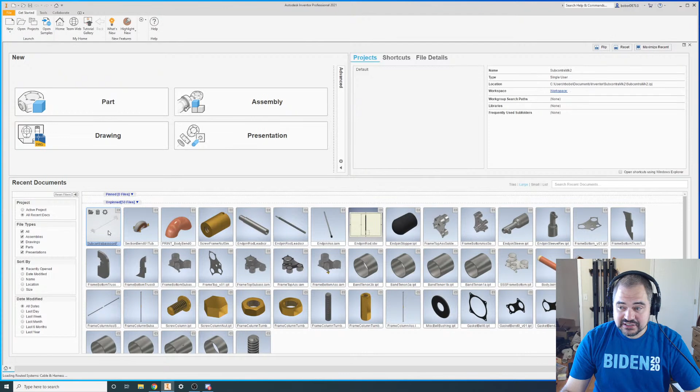So let's get this open, and I'll talk a little bit about what work I have to do. Hold on a second. Let me... Here's...

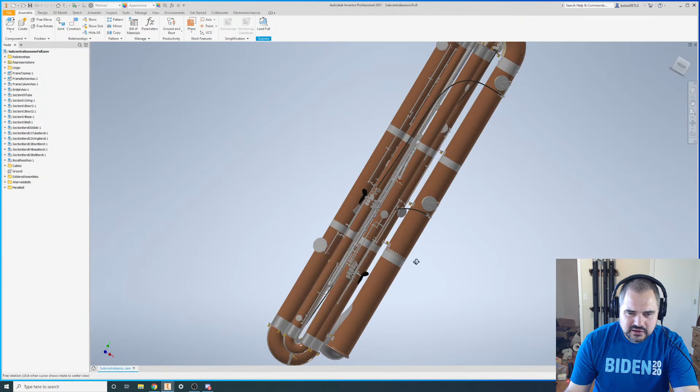Okay. So, actually, at one point this was a pretty concise and logical file. But as I've made adjustments and modifications and revisions, as I've actually been working on the prototype, gradually it's gotten a little out of hand. So, you know, we have two different bells, and the structure of these files isn't consistent.

So now that I have it on my home computer and don't have to go all the way to the shop, I've been going through and modifying these to get everything nice and logical again. So let's hide. So I've been going through in order.

If anyone can actually hear me, can you post something in chat? I suppose I should have checked that first. Okay. Yeah.

Okay, so here we have the parts of the assembly that I've already worked on, that I've already gotten updated. So the top and bottom frame, the end pin, and this central support column. There were quite a bit of revisions here, but let's go ahead and open this subassembly here, the top frame. We can take a little bit of a closer look.

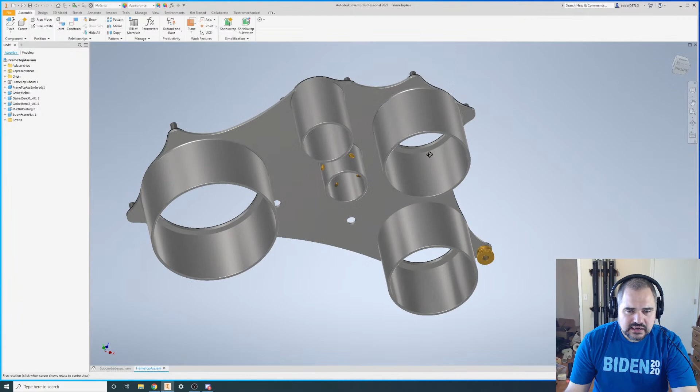I did make one change here. So if we go into this subassembly, this is the subassembly for the top frame, all the pieces that are eventually soldered or welded together. So I did have some changes I made here, just with the way these studs weld up here. I think this will make it a little bit... There we go. Should make it a little bit easier to see these edges.

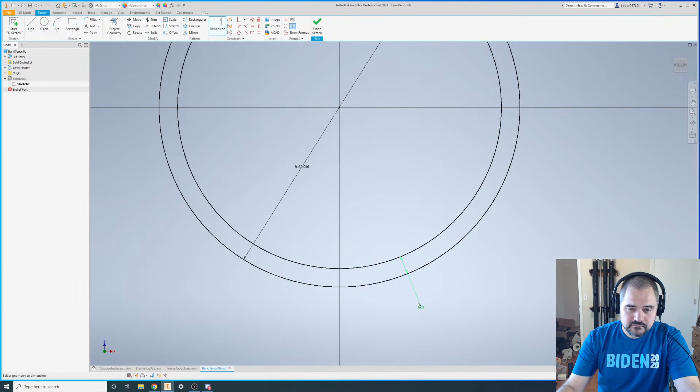I also made a change here on the version I have behind me. I'll open up one of these tenons. On the version I had behind me, I had a thickness of 1.5 millimeters. But going forward, if I'm ever lucky enough to make a second subcontrabassoon, I'm going to make these slightly thicker. So thicken that out to 2 millimeters. And then all of those, likewise, 2 millimeters.

But yeah, that subassembly is pretty straightforward. It's a pain to weld, but the actual geometry isn't that complex. I also did away with... Originally, I had all of these tenons had holes in them, but with the column, I began to feel like those probably weren't necessary, and so I got rid of most of those, with the exception of this tenon here.

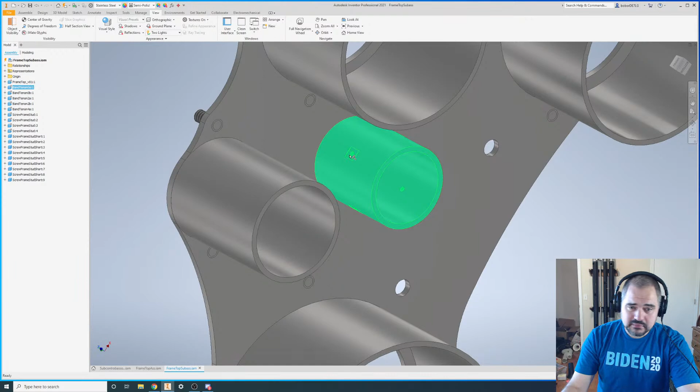And the reason I kept them here is because this is the tenon for the tube assembly, and the tube assembly is not going to be supported by the bottom frame, only by the top frame. So I figured these retention screws would still be useful here. All right. So yeah, we can see these tube assembly retention screws.

And so what I've done is I have two versions of this top frame. One is an actual assembly that has all of the subcomponents. So each of these studs is separate. Each of these tenons that has to be individually machined are separate.

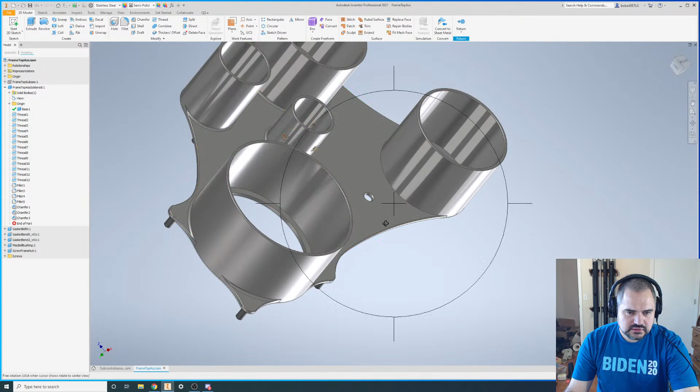And then I also have a soldered assembly. So this is just a separate version of the subassembly that I've gone through, and I've made all these aesthetic welds. Actually, I missed one here. So can do that real quick. Let's see. Yeah. So I missed this corner there.

And I don't really need this, but these soldered assemblies are what I end up using for the glamour shots, like on the website. Okay. So yeah, there's the top frame. Most of the changes are pretty small.

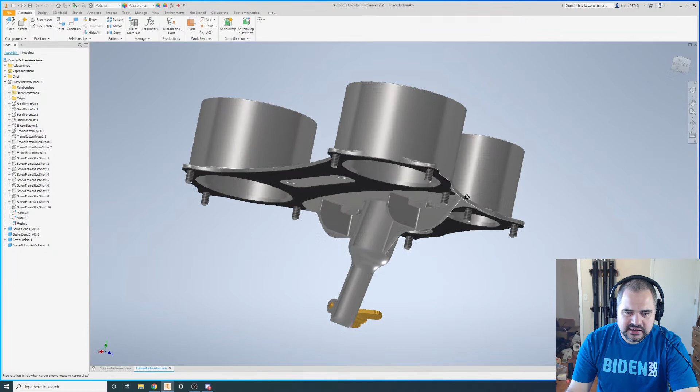Now, we can open up the bottom frame. I made the same changes. So I thickened these tenons to 2 millimeters instead of 1.5. I got rid of the retention screws, and I also changed the end pin sleeve to match the way that I actually ended up making it.

And then, like the top frame, I also have a soldered assembly for renders and other things like that. I also changed, well, I'll talk about that in a little bit.

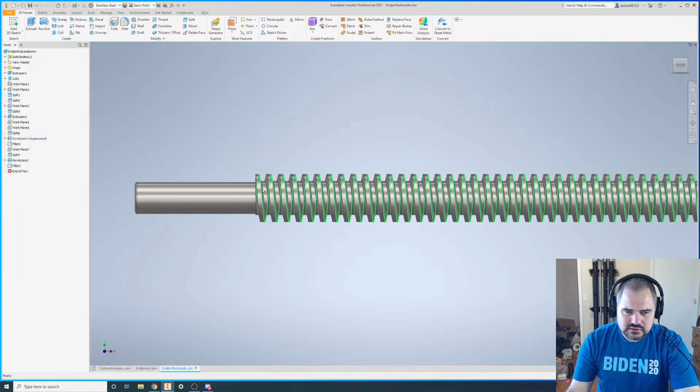And then if we go to the end pin, the end pin is actually quite a bit different. I originally had planned on using some custom threading for the end pin, but eventually I decided that it would be easier just to use readily available lead screw threads, and then just machine that.

And then the slightly different design of the end pin stopper that I ended up using matches the ones that I was able to buy. These are just 10 millimeter upright bass end pin stoppers. So got all that done.

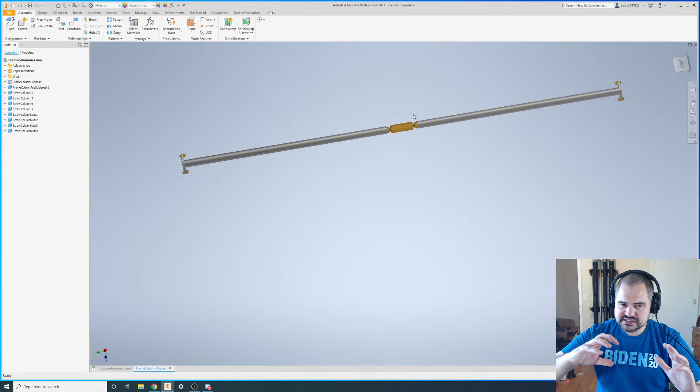And then the biggest change here was I completely redid the column assembly. So by adding a turnbuckle here, I'm able to adjust the length of the column without adjusting the angle of those top plates. So this allows me to not only use the column to gently push it apart, but I can also use it to gently pull it together. So overall, I think I'm pretty happy with this construction here.

By the way, if anyone has any questions, feel free to ask. I don't exactly have an outline of what all I'm going to cover.

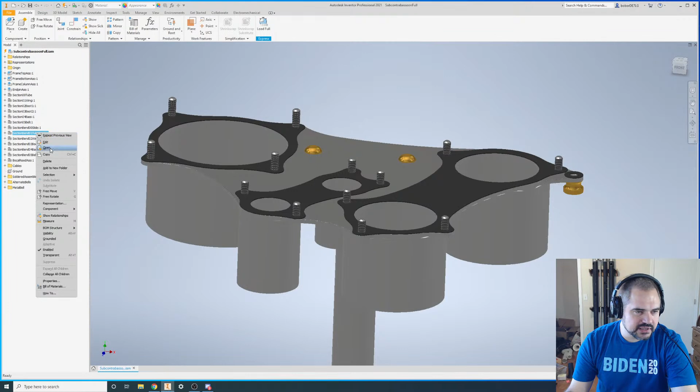Okay, so that's what I've done so far, getting everything up to date. So let's open up a new part. Let's start with this part here. This is the smallest body bend. And it looks like that.

And so there's a couple of things that are kind of out of date here. You see I still have these seams here from when I was planning on making it out of a solid piece of plastic in 2 halves, and then sandwiching those 2 halves together, similar to how the top bend on a contrabassoon is made. And I want to keep those files. I don't want to delete them, just in case I change my mind. But I do want to move them into a separate folder so that they're easier to hide.

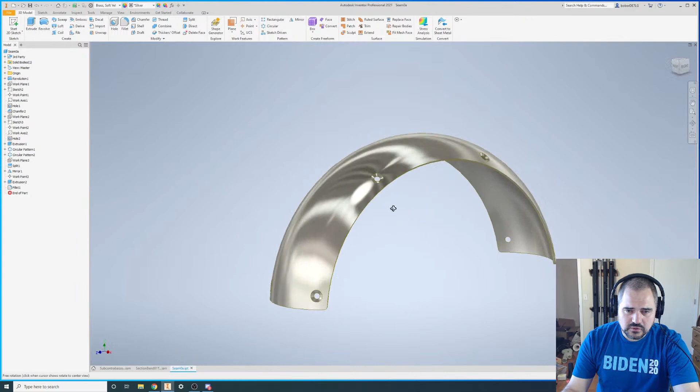Now, one thing I've been doing is updating all the materials. There's some out-of-date stuff here. So let's change. There we go. So I've changed the material itself to brass, which means for any sort of weight calculations, it's going to be brass. And then if I were actually making this, I would probably want to silver or nickel plate it. So I've added an appearance of silver just to make it pretty. I thought about adding a slight fillet on all of these edges for rendering purposes, but I don't think that'll be useful.

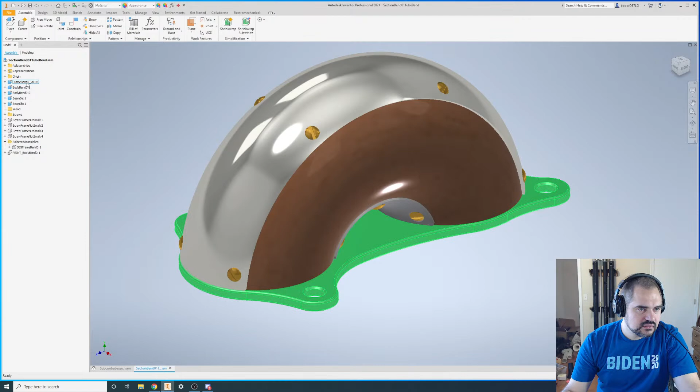So let's create a, hold on a second. So I'm going to create a new folder, and I'll just call that folder wood. So this is the construction I would need to use if I were making this bend out of wood. Let's hide all of these for the time being. So anything that I'm only going to need if we're making it out of wood, I'm going to put in this folder. So both of these, the seams, and all of these guard screws. So now I can hide and unhide this whole folder at once easily.

Let me make that material change here. So Jared is asking how I would make the metal guards custom formed? Are you talking about these seams, the pieces that hold the 2 halves of the bend together?

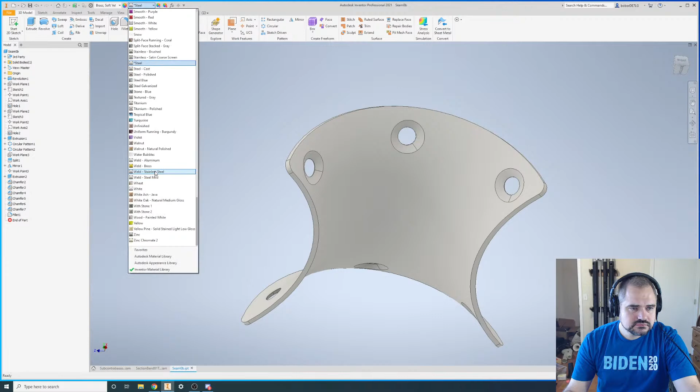So the way that I was probably going to have to do these is almost like a little roller. You take a flat piece of metal and then you roll it through a form. I've seen what they use at the Fox factory to do this. I wish I had a picture of it to describe it, but it's this bizarre looking roller. And I would have needed multiple ones. So if I don't need to make these pieces out of wood, then that will save me some custom tooling.

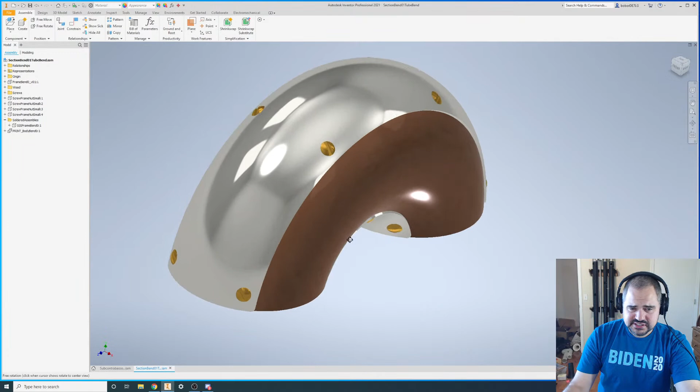And I should say that I've come close to deciding that for the bends, 3D printed ABS is just the way to go. Even if I were making the rest of the instrument out of wood, I would be very tempted to use plastic for these bends, just because it drastically simplifies construction. It lowers the weight. It allows you to do any profile you would want. Now, for reasons I've talked about in other videos, these are actually cylindrical bends. But if I wanted these bends to be conical, by 3D printing them out of ABS, I could do that easily.

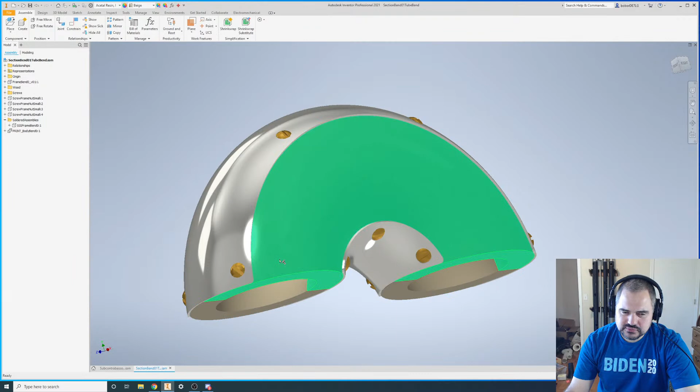And as I've talked about in an earlier video, acoustically, there's good reason to believe that cylindrical bends would be just as good, if not better, than conical bends, which is what you might expect you would want. Okay.

So these are, well, hold on. Let me open this and make sure. Okay, yeah, that's fine. Don't need to get too complicated with these little tiny screws. So let's hide all of those and get the updated version, the version that I've actually made and think is the best option. Delete that. Okay, so let's start here. This is the frame assembly.

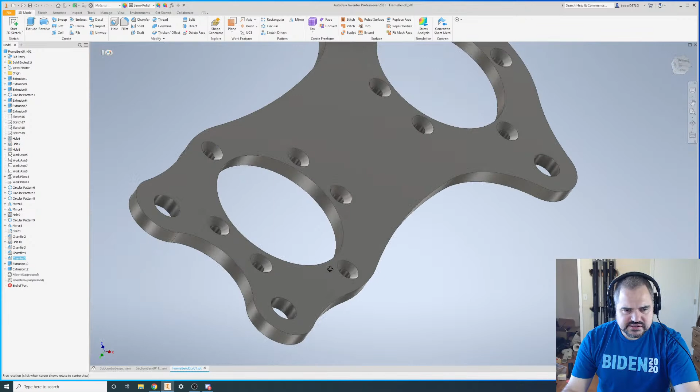So the only change I'm going to make here... okay, yeah. So the thing I'm trying to fix here is, this part isn't soldered to anything, so I don't need to make a separate subassembly. But I also have, for instance, this fillet here that is just cosmetic for the renders, as is this little chamfer here.

Trying to figure out if I should make 2 copies of this. Okay, I'll keep the 1 copy, because the way it is now, I can't export this face as a DXF because then it would be slightly undersized. But I don't need a whole separate file for that. Since these are at the end, I can just move my end of part up, export the face, and then move the end of the part.

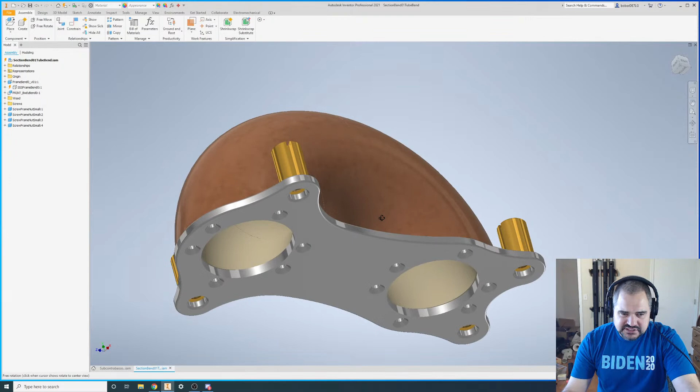So that'll be fine. So Seltzer asks, how would you finish the bends in a way that satisfies traditionalists? I tend to be of the opinion that if it's plastic, I'd rather it look like plastic, not pretend to be something else. The inner bore of a bassoon wing joint and half the boot joint is not wood. It's lined with either rubber or plastic. And even on the contrabassoon, most of the bends are made out of metal rather than wood. So I wouldn't think it would be that big of a deal. If someone was that concerned about it, I would suggest they just make it out of wood, rather than trying to make the plastic look like wood.

Okay. Now we have all of these frame nuts. Those are fine. And let's go ahead and open this. So this is the modified version of that bend that I've designed for 3D printing. I have the pilot holes for those screws already modeled into the piece. I've divided it into 4 segments to be glued together with ABS glue.

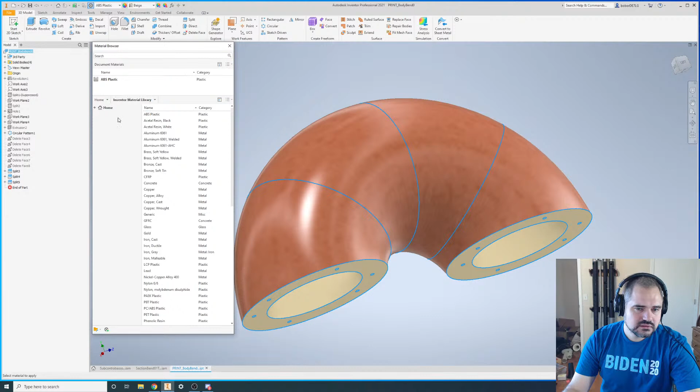Now, one thing I am going to change. Right now, I have the material set to Delrin, which isn't going to cause a problem, but if I wanted accurate weight, it would overestimate the weight by quite a bit. But it's not going to give me an accurate weight for 3D printed parts anyway, because the 3D printed parts are hollow.

Austin says hi. Hi, Austin.

Okay, so let's clear all of that. So wait, why do I have 5 bodies? Okay, I don't. All right. So let's just change that to smooth black to more accurately reflect the material. And of course, once I export this to Blender, I can assign any value to this I want. Okay.

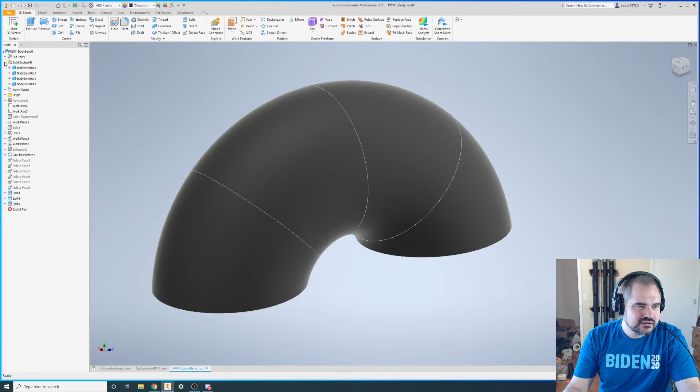So yeah, let's rename this. Right now I have a prefix of print added to all of these. Since this is going to be the main way that I'm planning on doing this, I'm going to change that to, let's just say, body bend 01 R1, so revision 1. Probably what I'd like to do is make a separate copy of this that's not divided, for rendering purposes.

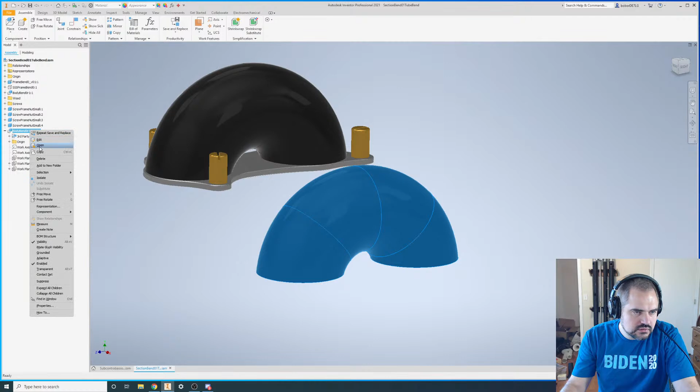Okay, so I'm going to change the name of this one as well. The easiest way I know how to do that in Inventor is save and replace. Okay, body bend 01 R1, and save and replace this. And I'll make a glued version of this. And then I can just undo all of... I can delete all of these splits.

And what are all of these delete faces for? Delete those. Delete all those pins. So these are, well, here. So if we go back to the version that's been split up, you can see here I have the holes for alignment pins. This is just 1.75 millimeter nylon filament that I've used here to get these pieces in alignment, but I don't need them for the glued model.

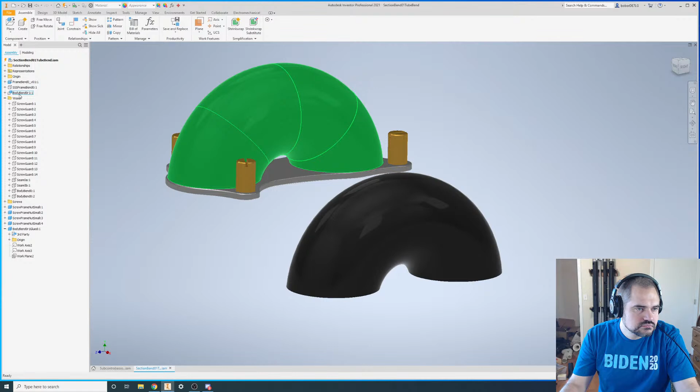So I can delete those, delete those. Yeah, that's fine. Don't need any of those. I do want those. Okay. There we go. Select all. Smooth black. Okay. So now I have a... I actually ended up with 3 versions of the body. So the construction version, which has the 4 separate components, the wood version that has the 2 halves, and then the single version.

And I'm just going to align this other version. Since the glued version is a copy of the construction version, I'm just going to constrain it to all of the origin axes. And then that will get it exactly where it needs to be. Okay.

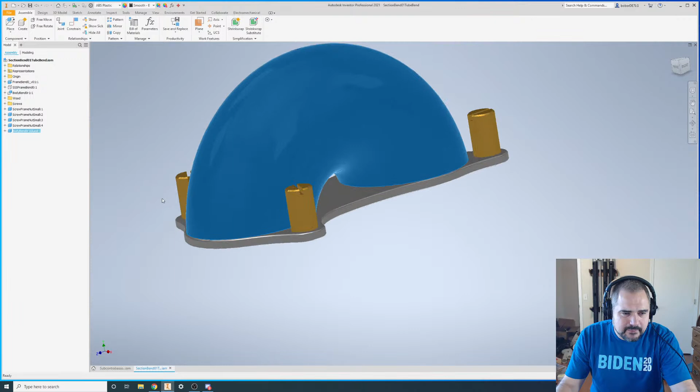What progress, Seltzer asks, have I made on the subcontrabassoon reed? Well, I haven't been messing with the reeds too much, but I did make a shaper. If you look at one of my recent live streams, there's a stream called Shaping a Shaper onto Shapeoko, where I go over the process of how I made a shaper, including a subcontrabassoon shaper. So that will make experimenting with reeds much easier when that eventually happens.

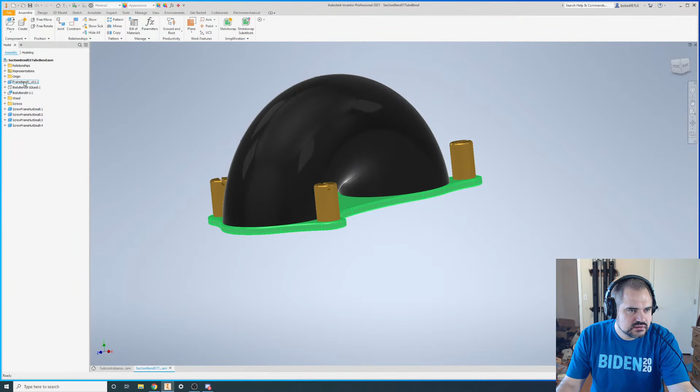I don't need this. Okay. So all of that, and then, okay. So I think that does it for this part here. And I can go ahead and make that visible here. And then go in and hide the wood stuff. And wait, that wasn't right. All right, there we go. So, all right, actually, before I move on to something else, let's open up one of these and take a look at the construction here of this body joint.

So these bends are actually quite simple. I've taken a cross section here with a given radius, a given inner diameter, and a given wall thickness. And all of those are calculated from the master spreadsheet. Well, here. If I go into my parameters, this section here, these are parameters that have been imported from the master spreadsheet. So hole position F1, hole size F1.

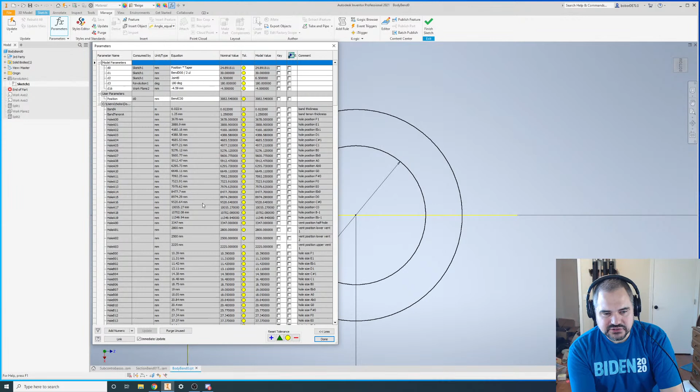The original thought was that this would make it easier to make changes by just changing a spreadsheet. In actual practice, I shouldn't have used this much of a spreadsheet, because now if I do want to change one of these variables and update the spreadsheet, it literally takes like 10 minutes for the entire model to update.

So the user parameter of position refers to the spreadsheet parameter of BendC00, which if I go down here, it's just the position in the bore at which this bend starts. So 3082. So instead of just entering 24.892, I'm multiplying the position times the taper, which will produce the diameter at that point. And then the wall thickness is also a parameter, as is the radius.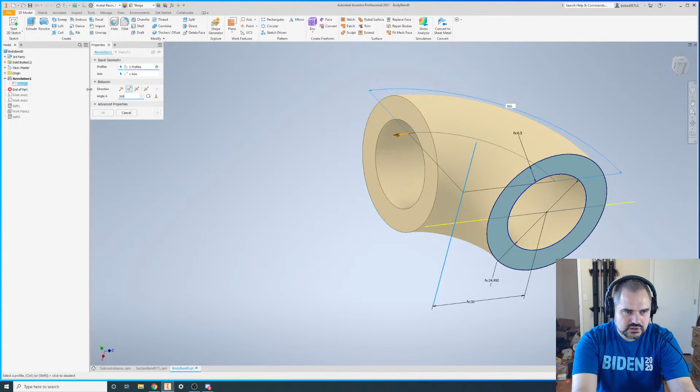And then that is revolved around this central axis, 180 degrees. So I could do 90 degrees for a quarter bend. I could do 360 for a donut, but I need a 180 degree bend. And then these are just work axes for constraining the part.

Then I've split it in half. And then I've cut off a little bit from the end to make up for two things: for the thickness of the plate that it's bolted onto, and also to compensate a little bit for the acoustics of having such a tight bend. So let's go back here. So that's how the geometry of these bends are.

Austin, I think you were asking what this is. This is the top frame assembly that kind of holds the entire subcontrabassoon together. And then there's another frame assembly on the bottom.

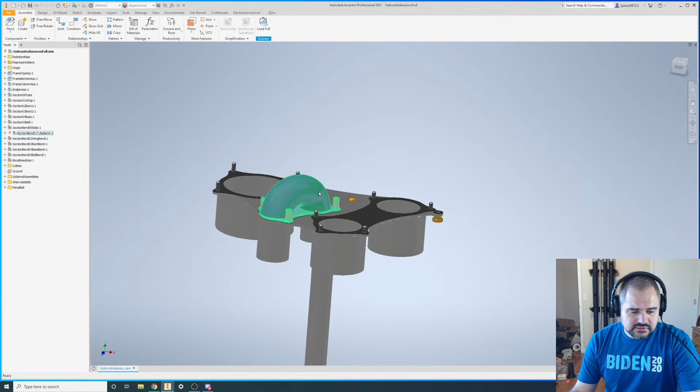So when you have a bend, the tighter it is, and by tight I mean the larger the bore diameter relative to the bend diameter, the more that bend deviates from how it would sound if it were a straight piece of the same length. If you have a big sweeping bend, like the type you're going to see on a lot of brass instruments, the difference is negligible. But on some of these very tight bends that we like to use on woodwinds to make things practical, there can be deviations. Specifically, it can interfere with the tuning in different octaves or different registers.

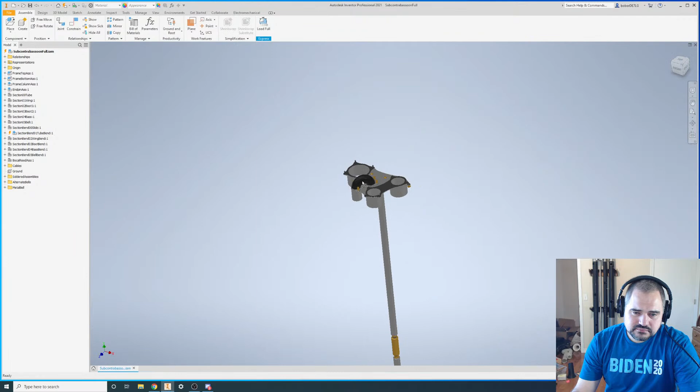So this one isn't that severe, this bend here, but ideally, sorry, trying to think through this while talking. It needs to be shortened a little bit to function with the length that it needs to.

Okay, so what's going on here? Update. Okay, now everything's relationship with undefined geometry. Okay, yeah, I know what that is. So all of these frame nuts were constrained to these holes before I chamfered them. So then when I chamfered the holes, it threw an error.

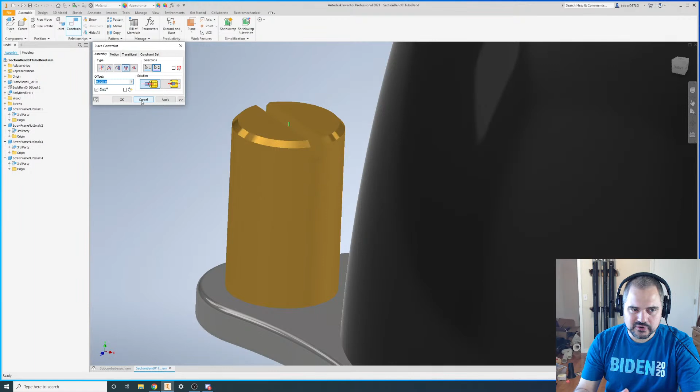So instead of doing an insert constraint, which is essentially constraining that circle to this circle, that's what I did before. But as a consequence, if I get rid of that chamfer, the constraint breaks. So instead, what I'm going to do is two constraints. First, I'm going to do a mate constraint there. So surface to surface.

Okay. So now the frame nuts are constrained to be flat with the surface, but not with the hole. And now I'm going to add a center line, mate the center lines to one another. So the end result will be the same, but now if I get rid of those chamfers for some reason, it won't break. Okay, there we go.

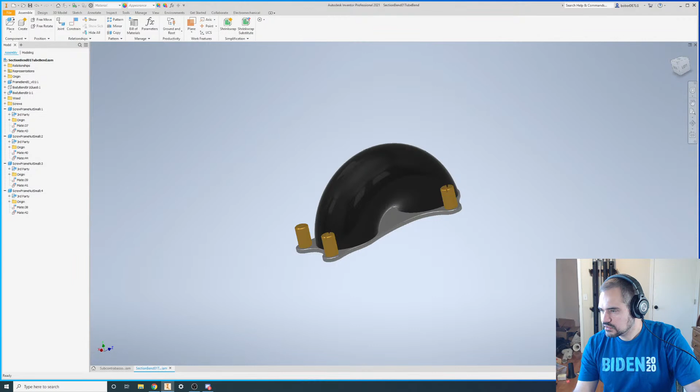Oh, amazing sound effects. Yeah, when you work with Inventor, it becomes a very reassuring sound effect, that nice little pop when a constraint goes through, because the other possibility is that the constraint that you try to add conflicts with a constraint, and then you get the evil bong, like boom.

Here, I can do that. So if I just constrain, there we go. Yeah, that's the sound you don't want. That means you tried to do something illegal. Okay. So that should be it there.

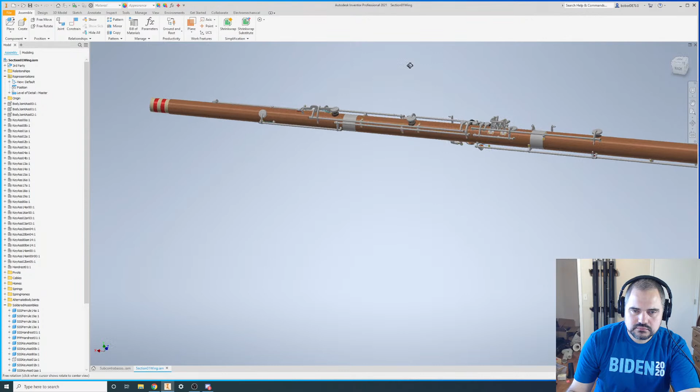So while I'm here, before I go through and update the rest of these bends, let's take a look at a different part. So this is the wing assembly. So these are the three body joints that make up the Subcontrabassoon wing section, with tone holes for F sharp, F, E, E flat, D, and C sharp on the back.

So I'm just gonna open up more of these. Hold on. So here we have the first body joint in a subassembly, and then open up that subassembly, and you finally get to the body joint itself.

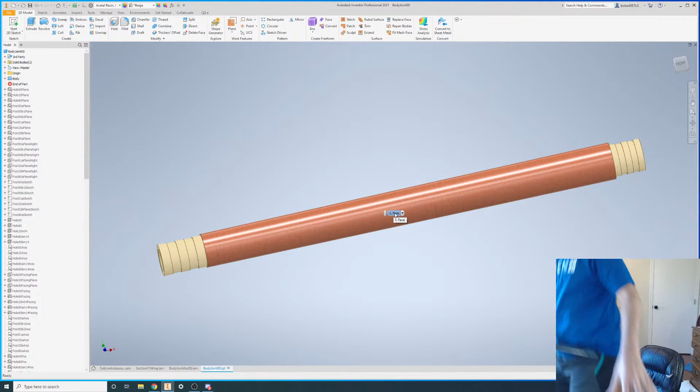So much in the same way we talked a little bit about the construction of the bends, I'll go ahead and open up this so you can see how this is constructed. I'll move the end of part all the way to the beginning. So this is how it starts. Actually, hold on a second. So this is the part that I have on screen right now. You can see that just like the part on screen, I just have the outer profile. I haven't done any tone holes yet.

But I tried something interesting here. Instead of machining it out of a solid rod, I 3D printed this solid. So instead of a couple shells and then hollow in the middle, this was printed with completely solid 100% infill, and then glued together, and then I put that on the lathe and machined it just like any other piece of material.

The big advantage being, instead of having to hog out all of that material, it was only slightly undersized for the reamer. So that ended up saving a lot of trouble, and it's also much lighter than Delrin. ABS is about, I think, 1.05 grams per cubic centimeter, whereas Delrin's more like 1.5. So 1.05 versus 1.5. So even 100% solid, this is significantly lighter than Delrin. A little bit heavier than it would be if I made it out of maple, but lighter than Delrin. Okay.

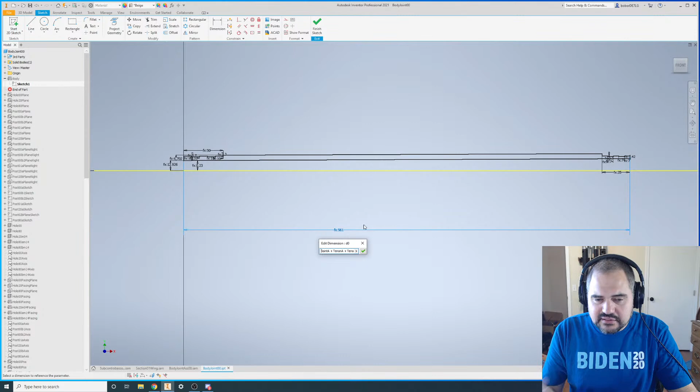Okay. So once again, this is a revolution of a sketch of a cross section around an axis. So if I open up this sketch, you can see that I just have the basic bore. So here we have the calculation of the overall length based on some parameters I've set in the spreadsheet. Likewise, here is data it's pulling from a spreadsheet. More data from the spreadsheet. So all of this is constructed from the spreadsheet.

So if I'm willing to wait 5 minutes for the spreadsheet to update everything, that theoretically makes it easier to update. So for example, here we just have the position, which is the position along the bore where this body segment begins, times the taper, divided by 2, because this is the half of the profile. And then we have the tenons and the little indentations for string. Then we edit. And this is just another rotation about a central axis.

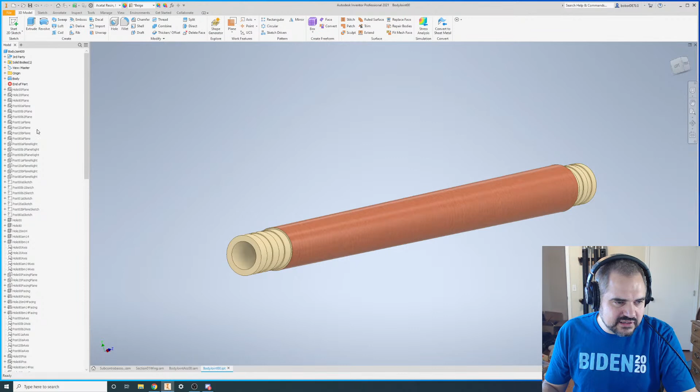360 degrees. So the next part I definitely could have done more easily. So there's all of these work planes and work axes, and all of that is for positioning these holes, as well as giving myself all of the, well, here, I'll show you what I mean. Okay.

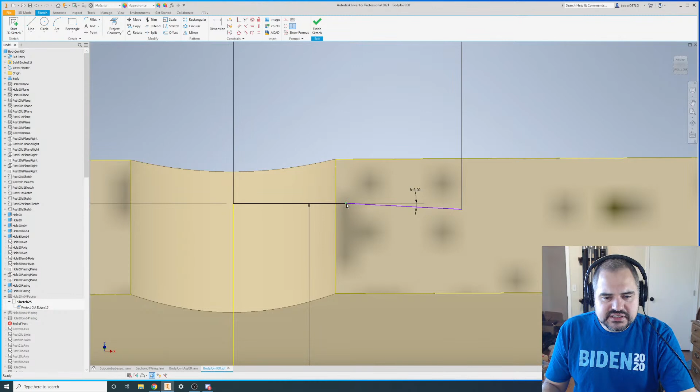So these are the holes themselves. And then if we go down here, we have the hole facings. Okay. So all of those work axes that I defined up here, these work planes and work axes, allow me to get a sketch plane where I need it here. So this is where I'm defining the facing of the tone hole. So actually, let's not do that. There we go.

So on a woodwind, unless you're playing it with your fingers, if it needs to be closed by a pad, of course you don't want just a plain hole. You want a facing for the pad to set on, and that's what I've done here.

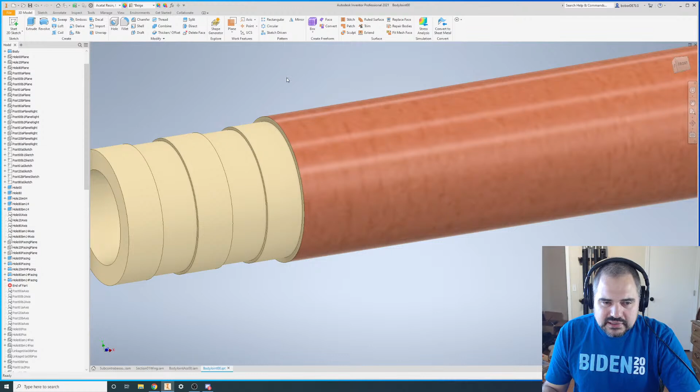Seltzer asks, why did I use a thread fit instead of cork? Because it's more flexible, more room to adjust for things that go wrong. With cork, you could end up having to do a lot of sanding. I just felt like thread was the better solution for this particular design. Also, if I end up putting it together and then some of the body joints are loose, I can just add a little more thread, not have to completely tear off the cork and replace it with thicker cork and then sand that cork. Yeah. I'm not suggesting that thread is necessarily better. It was just better here.

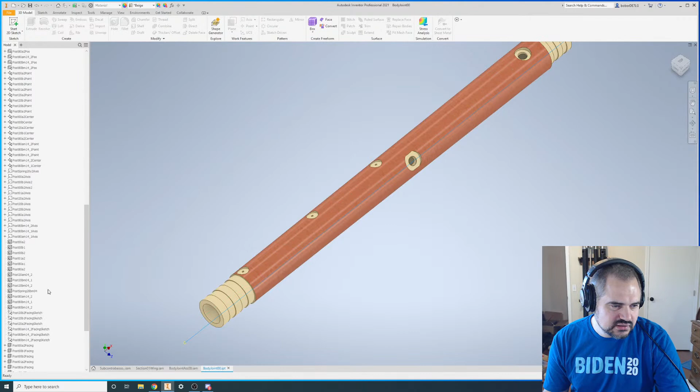Okay, now all of these here are working to define the posts, the post locations. So if I go down here, we have a post there with threads. So because everything's at a slight angle, it does actually end up getting fairly complicated in order to position all of these post holes.

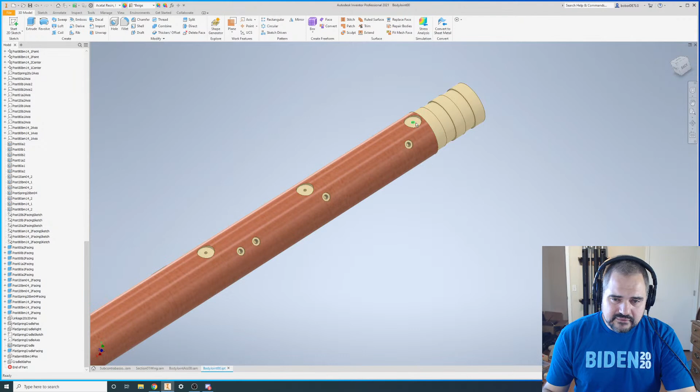Not only positioning them, but for example, some of these post holes are only required on certain modifications. So for example here, you see there are 3 half-hole vents instead of 1. That's because I'm planning for the possibility that I might need 2 half-hole vents, in which case this vent and this vent would be the ones I use, instead of the single vent that I'm planning on, which means that I need to have a plan for all these post holes that may not even appear on the finished version. Okay.

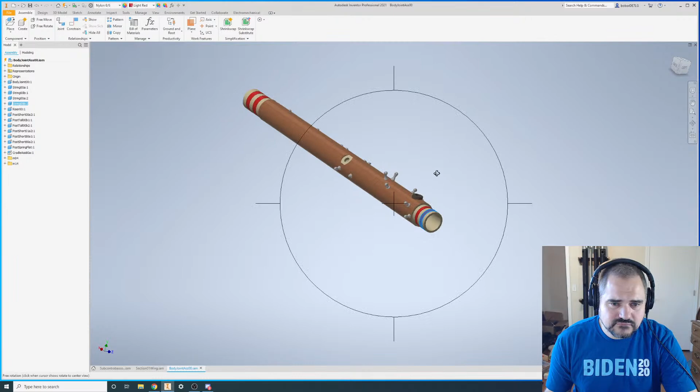Okay, so I can close that. And then in the subassembly, I've just added the components that only involve this single body joint. So all of the posts, this tone hole riser here, the string, and this cradle here.

And we can see here I've suppressed some of those features at some point because I cut these out on the Shapeoko, so I needed to export this face without these chamfers. So that's why all of that was done. Here, I'll go ahead and update this while I'm at it.

I did end up making those out of brass instead of nickel silver, just because I had some extra brass and didn't think it would make any difference whatsoever whether I made those out of brass or nickel silver. Means it looks slightly less pretty because you don't get that contrast between the silver cradle and the brass screw, but whatever, it's fine.

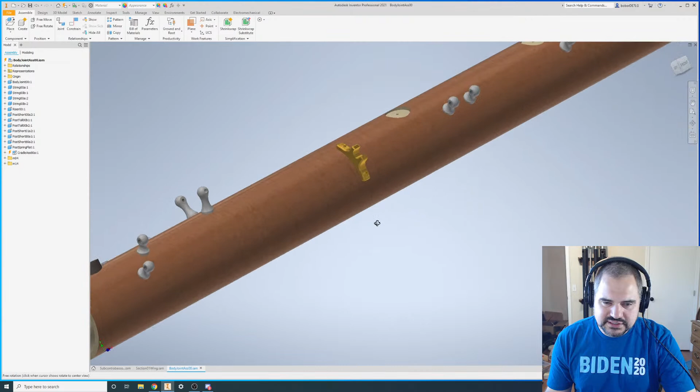Now these posts, I am going to have to go through and change some things. If I sketch. So one issue I ran into, let's see if I can find this. Save. Okay, here we go. So when I originally started the design, I kind of made an assumption that the 5mm posts were actually going to be 5mm, and the 7mm posts were actually going to be 7mm. Unfortunately, when I ordered these posts and got them in, I discovered that they weren't.

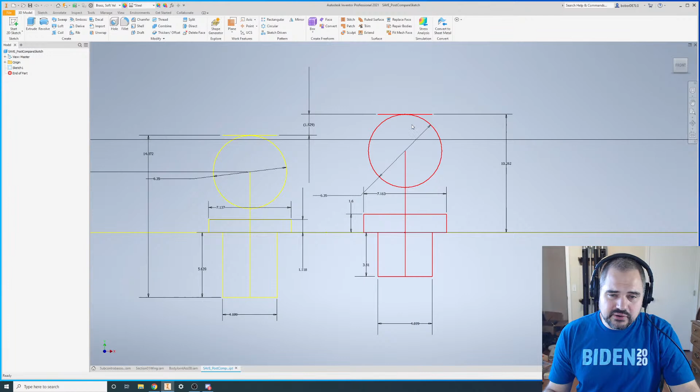So here in red is what I expected the post to measure based on the dimensions I got from the company, but the yellow is the actual measurements. So I am going to have to go through and modify those posts. Now, instead of adjusting the...

Instead of changing every key, because if I change the height of these posts, that affects the height of every key, what I'm going to do is just change the depth of this counterbore here to adjust for the discrepancy.

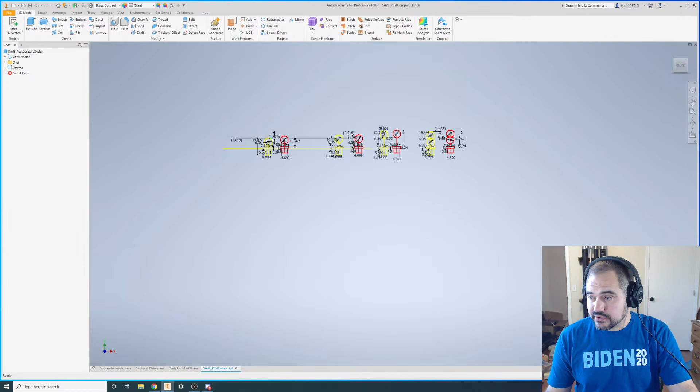Luckily, the post that I use the most often, the 7mm post, was quite accurate, only about 0.2mm discrepancy, and this post here with the largest discrepancy, over 1mm off, I only used it at one point on the top bend and I ended up making adjustments there anyway. So it's not going to be that big of a deal, but it is something I'm going to go ahead and fix now, or not on this stream, but soon.

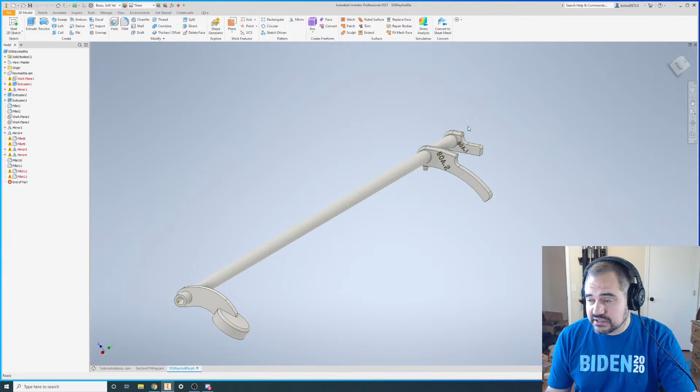Okay, anything else worth talking about here? I think that's okay. And then once we get the entire section together, that's when I added key work. So if I open up here, we can see a key subassembly. And right now there's a bit of a mess, some key work has an aesthetic chamfer, some doesn't. You see there's a whole bunch of... Okay, I see. Hold on a second.

Okay, yeah. So here we have a key assembly. Right now they have some modifications that I made for cutting them out on the Shapeoko, like stamping the name in there. The label of the key isn't going to be stamped on there on the finished version. I just needed this here. So when I was having to export the SVGs for nesting purposes, it's a little bit convoluted, but this is why I'm looking forward to going through and fixing all of this up. And actually, you all might find that interesting. Well, I think I'll have to talk about that later.

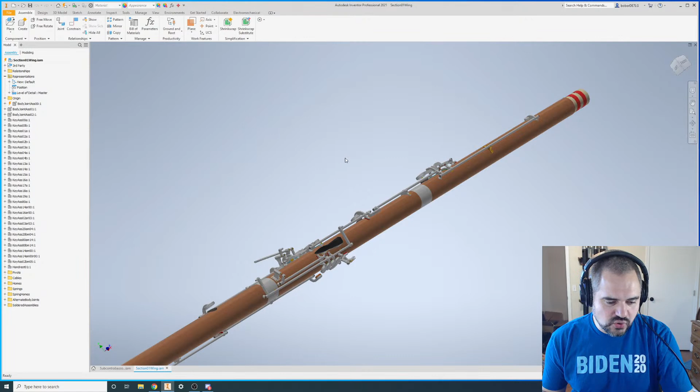If anyone has a question on how some part of the Subcontrabassoon is built in CAD, now would be a good time. And I'll either answer now or make a note to answer that in a future stream.

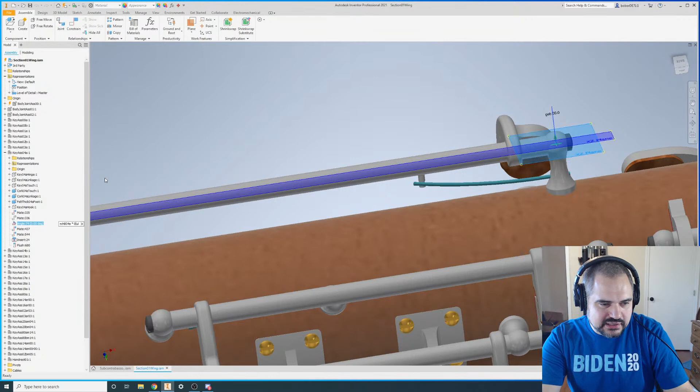Oh, I wonder if this has completely broken. Let's see. I was actually kind of proud of this. If I remember correctly, at one point I actually had this set up so that, here, I need key assembly 04A. Okay. So, if nothing has broken, if I change this so the key is depressed, that spring should automatically bend to shape. Ha! Completely unnecessary, but it made me happy.

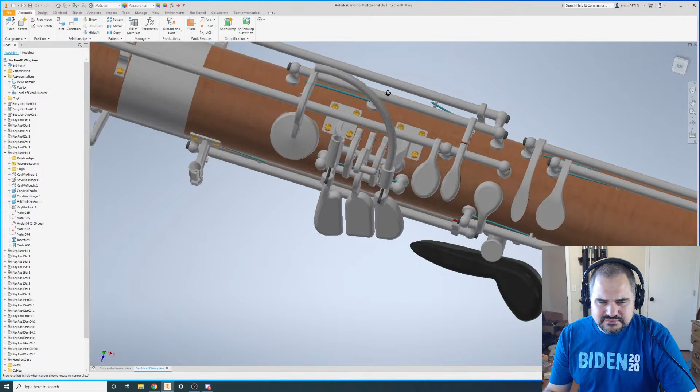The Aquarian Space asked why Autodesk Inventor. Autodesk Inventor is the program I learned to use when I was working for my dad full-time. It's the program he uses, so that's what I learned. I've since worked a little bit with Fusion, and it does do most of the stuff Inventor does. I'm more comfortable with Inventor, and it does some things that I haven't been able to get Fusion 360 to do, like taking a straight piece and then bending it rather than having to loft along a rail, which isn't really applicable to the Subcontrabassoon, but it is something I've used on some of my contrabassoon bells.

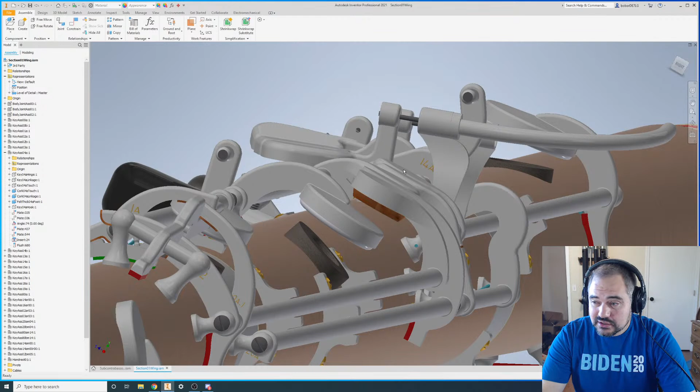To the best of my knowledge, Fusion 360 is the closest thing to a free 3D CAD program I've found. Inventor, I got lucky. I was able to install it on my home computer because they have an education program that allows you to download and use it if you meet certain requirements. For the longest time, I just assumed that being an adjunct bassoon instructor at a tiny university in Cherokee Nation wouldn't qualify me to download Autodesk Inventor, but apparently it did.

But not everyone is going to be able to do that. So Fusion 360 is a reasonably good alternative, but I haven't really tried moving things from Inventor to 360 and back yet, and it doesn't look especially fun. I think you might have to export it as a step file, and since all of these files were already in Inventor, it makes things so much easier to just keep it with Inventor.

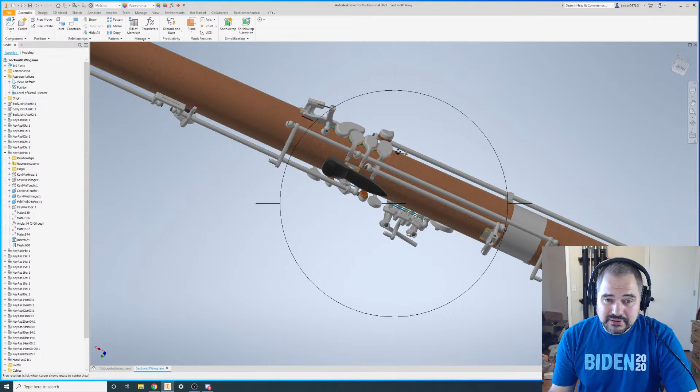Okay. Trying to think if there's anything that you all haven't gotten to see yet. So here's the tube assembly, one of the more complicated parts. Once again, subassembly within subassembly within subassembly. Each key is its own subassembly, and some of those keys have modifications. Here I have something that's a little bit broken right now. This key arm is supposed to be at a 90-degree angle, but in order to cut out the part on the Shapeoko, I flattened it. So now it's sticking up at an awkward angle.

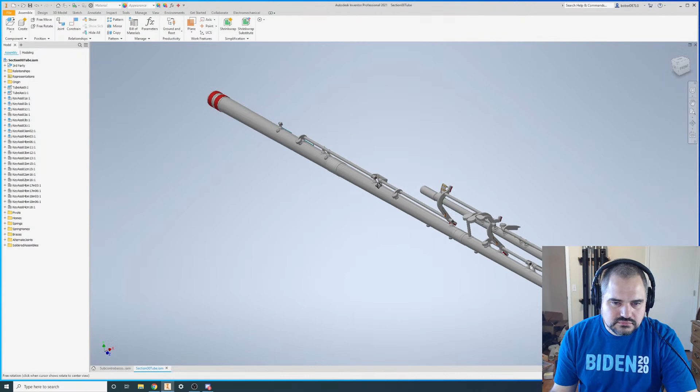So still a lot of work to do to get everything updated to where I'd like it. And this isn't my top priority right now. My top priority is getting the prototype itself, but keeping all of the documentation in line will make things easier in the long run, I feel.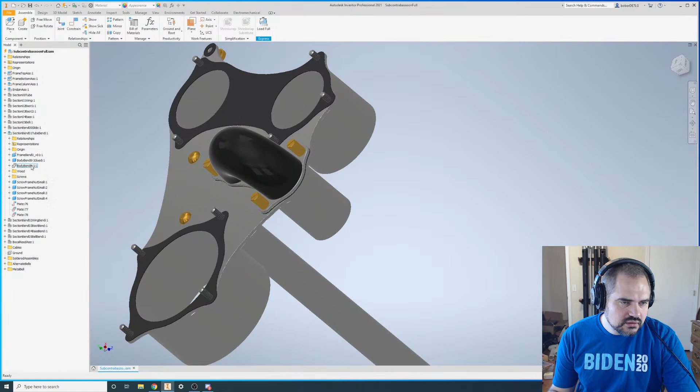All right, unless anyone has another question, I'm probably gonna finish up here soon. I'll go ahead and open here. So this is the wing bend, the second smallest. So go ahead and open these, update the materials.

Can we get a close-up of the current prototype? What do you mean by close-up? So the best, I mean, I'm happy to show you all a close-up at the CAD model, but if you want the best view, if you're on a desktop computer or you're on Wi-Fi, the best option would be actually going to the Subcontrabassoon website, and you can look at these renders freely.

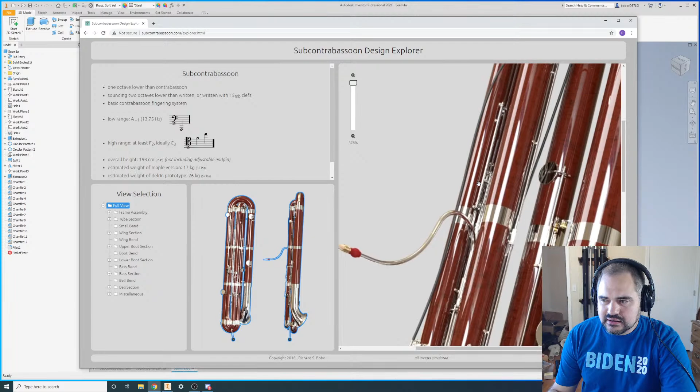Oh, the one behind. Yes. Yeah, I'll bring that a little bit closer soon. But in case anyone didn't know, you can go to the website and find renders. So this is what I was talking about before, the glamour shots. I have two versions of the file, one for construction and one for appearance. So if we go into the frame assembly, these have welds and all that kind of stuff.

Okay. Let me get this updated real quick. So silver, where's, why is silver not an option? That's interesting. There

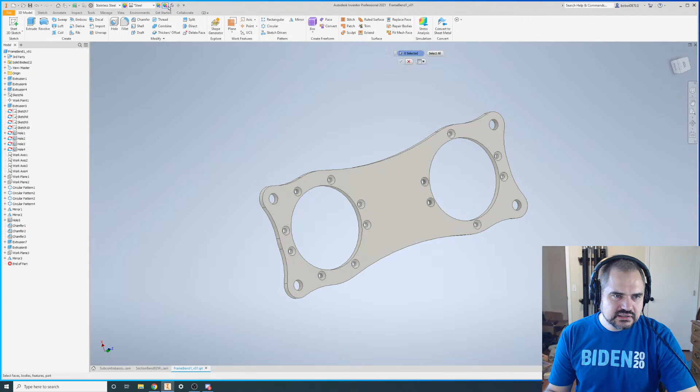we go. Zeno Tesla asks about the guan. The name does sound familiar, but I wouldn't guarantee that I could pick it out of a lineup. It's one of those things I have heard of, but not enough to really know a lot about.

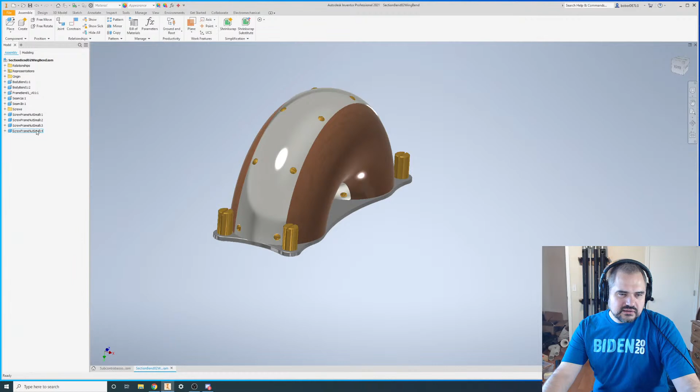All right, so go ahead and put this chamfer on, or sorry, the fillet. The Aquarian space is saying if I wanted the metalwork to be a different color, would that be possible? Do you mean in the software? Yeah, absolutely. If you're talking about getting parts of the actual prototype specially plated, like, I don't know, green chrome or something, probably also possible, but much less likely.

Okay, let's see. People wanted to... No. Sorry, I keep on forgetting these. Okay. All right, so I'll bring the prototype a little bit closer. I'm not sure I'm going to be able to get the whole thing in frame at once because I don't have a camera person, but we'll see what we can do. You know, the thing is big enough, I think you're actually going to get a better view of it back in the stand.

But you can see some of these bell support assemblies that I added not too long ago. This is that central column with the turnbuckle I was talking about. So if I loosen those screws at the bottom, I can turn this and it will adjust the length of the column to aid in assembly. Way up here, we have this top frame assembly, welded together out of several pieces, and these bends that I was talking about, each of these bends is made in 4 segments glued together with ABS glue, which is pretty close to chemically welding them together with acetone.

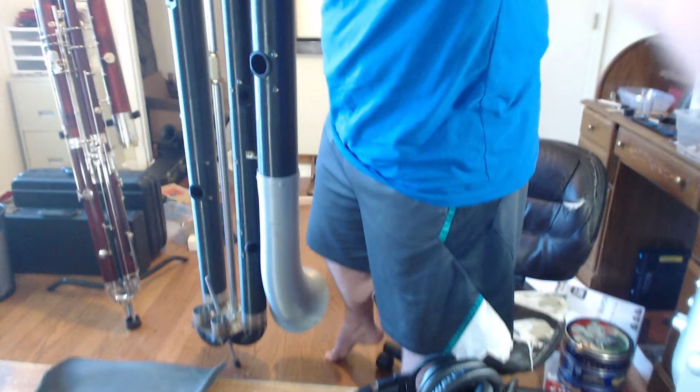And then way down here, sorry, you're going to see quite a bit of the mess. You can see the bottom frame and the end pin assembly. And I'm pleased to report the end pin feels very sturdy. The only thing that I'm not quite happy with so far is the central support column. It feels very sturdy holding it like this, but if the instrument's lying down and you try to pick it up from the central support column, it feels a little bit insecure. So there's a couple things that I might do to address that.

I do think I should look into getting a closer tolerance tap for this turnbuckle. And actually I didn't talk about it, but I already have modified the CAD model, so I'm making this turnbuckle a little bit longer. I'm making longer threads through all of this. So I'm making this threaded nut that's welded inside of the column slightly longer. The thread is longer, so there's more thread engagement. But it's also, I think, just going to be one of those things that I might need to tell people, hey, don't pick it up out of the case from the central support column.

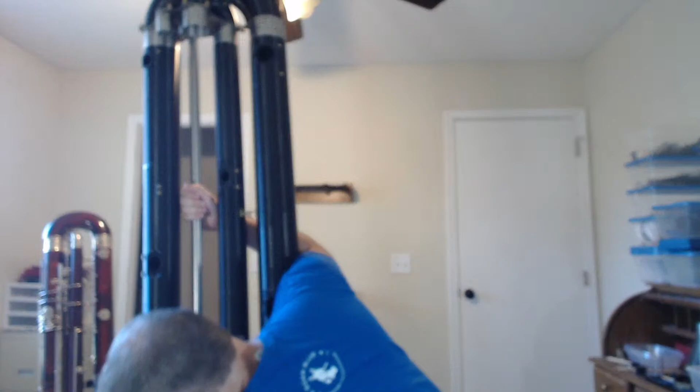But this is the first joint. So this is what's going to have the half hole vent, the open F tone hole, and the E to F sharp trill key tone hole.

Okay. Unfortunately, the actual physical progress that's visible here isn't that much. So behind the scenes, I've been working on making the reamers. I have made the reamers for the three smallest body joints. I've gotten one of them reamed out. So this is the finished bore on this one.

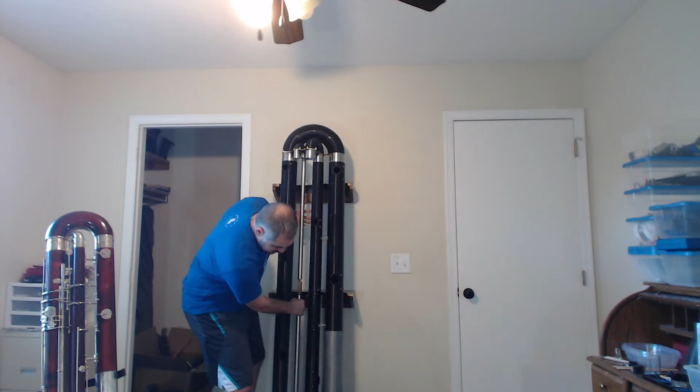Okay, I'm going to go ahead and put this back in the stand and try not to slam it into the ceiling fan. I almost need a camera on this so that I can see the end-pin stopper. Okay. There we go.

Bluesman1 asks, is the case modeled in CAD at all, or is it something you plan on having made by hand? I have not messed with the case whatsoever yet. Oh, don't do that. There we go. Yeah, the case is one of those things I figure I'll worry about when the instrument itself is ready, kind of like a car, because a case for this instrument would not fit in my current car. So I'm gonna have to figure that out as well.

Maybe I can just combine them and make a car that has a built-in Subcontrabassoon case.

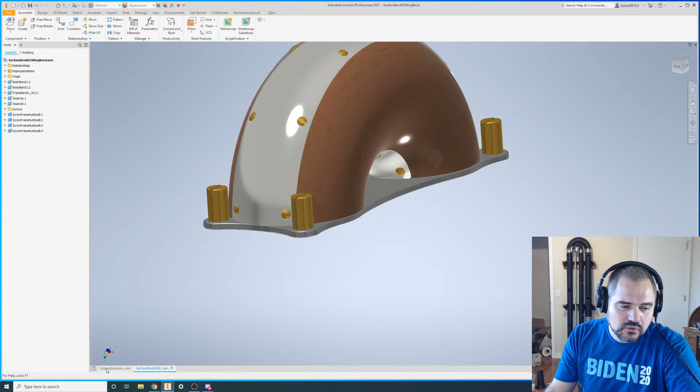One topic I would like to actually do regards modeling of some of the keywork. I'm not going to be able to do that today, but for example, excuse me, sorry. Let's open that. So for example, let's take this linkage here. This is the linkage between the low F key and the F to F sharp linkage.

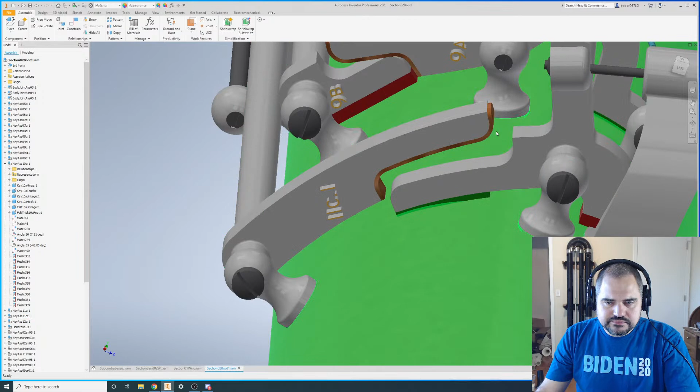So how did I make it so that these are the right length? It's a little bit finicky, but the method I came up with works pretty well. So for example, here when the linkage is in the closed position, everything lines up perfectly. And then when it's in the open position, it also lines up.

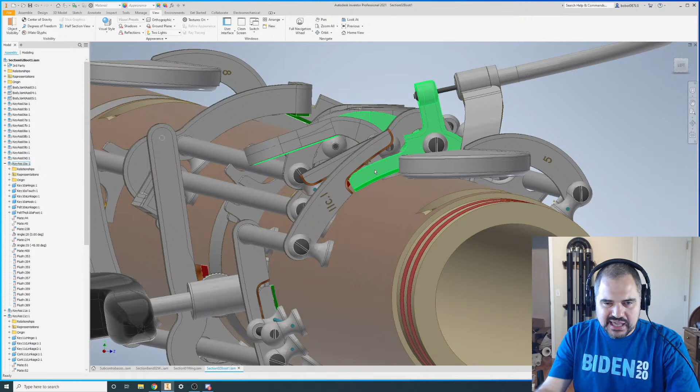If you look very closely, you might see that there's a little bit of an overlap here as the metal overlaps into the cork, but that was actually on purpose. I included a cork compression factor, assuming that it would indent into the cork very slightly. Now, of course, at this scale, it's really going to come down to manufacturing tolerances and hand filing to get everything those last few tenths of a millimeter. So the process is to get it close enough so that it works.